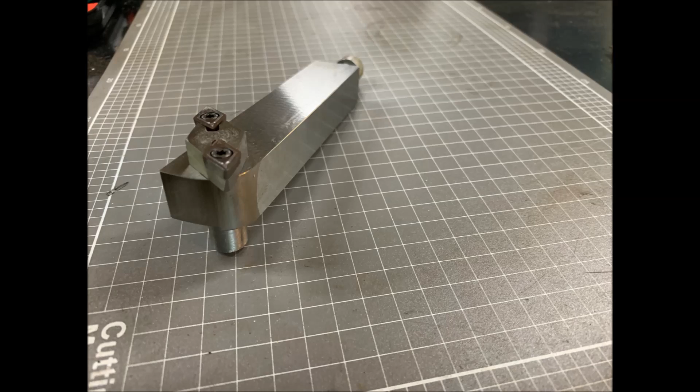Little diamond headed tool, and he sent me a couple of photographs of what he's done, and I must admit I'm absolutely chuffed to see somebody taking a description like this and making it their own, and he's done a fantastic job with it. So kudos to you, Warren. Great job. So there's the little locking pin.

Alright, that's the lathe slotter where we're at the moment. We've done all the slideways, milled in the dovetails, doweled it all in position, put the bridging plate across the top. So that's coming along very nicely at the moment. I'm really happy with the progress on that, but we're going to give this a rest for a week or two. I'm going to do a little series on something I used to do an awful lot of years ago, and that's pattern making and casting.

So I can't actually do the casting because I haven't got my little foundry set up at the moment, but I'm going to do a series on pattern making, and I was inspired to have a look at getting back into doing some pattern making by watching Emma at Emma's Spare Room. So any of you who watch her videos know that she's doing a little Henry Greenly designed Stuart Turner hit and miss engine, or a little gas engine, and she's doing the patterns and the core boxes for that little job at the moment.

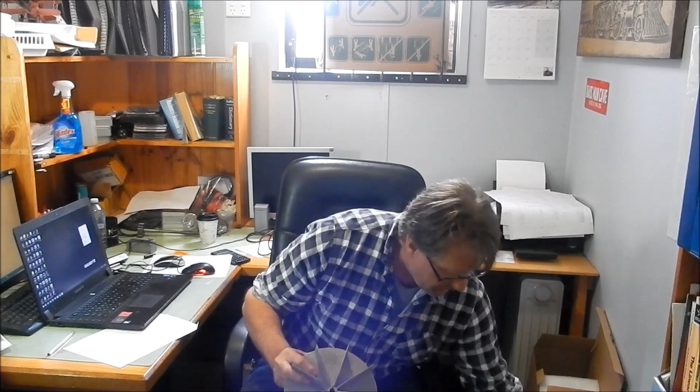And people ask me, how thin can you cast aluminium? Well, these ones here, we're down to 1 millimetre thick, and nearly 2 inches, 50 millimetres in depth. So we actually used to add a little bit more silicon into our aluminium, and I can tell you what, trying to put silicon into molten aluminium is like trying to dissolve sugar in cold water. Very, very hard. The patterns there for the casing, so yeah, we knocked out a lot of these over our time too.

We used to do loco plates, steam loco plates. I did a set of plates for the Puffing Billy Society years ago for G42, the Beyer-Peacock Garratt. So we used to do an awful lot of loco plates as well. So that was doing patterns by hand, and as I said, I take my hat off to Emma for what she can do there. It's absolutely brilliant. It does my head in if you can do those by hand.

I'll show you an example of some of the patterns that I've done by hand. I know for those little Zenith updraft carbies I did show the trial patterns or the trial castings that I did.

I actually saw a set of them on a Ronaldson Tippett tractor up at Lake Goldsmith, a big steam rally I went to last weekend. I was absolutely chuffed to see my castings that I'd done. I did a run of 25 of these sets for a bloke, and I was chuffed to see it on one of those old tractors. So I'll show you some photos of those handmade patterns for that casting set, and I'll show you the castings actually on the tractor. Have a look at these.

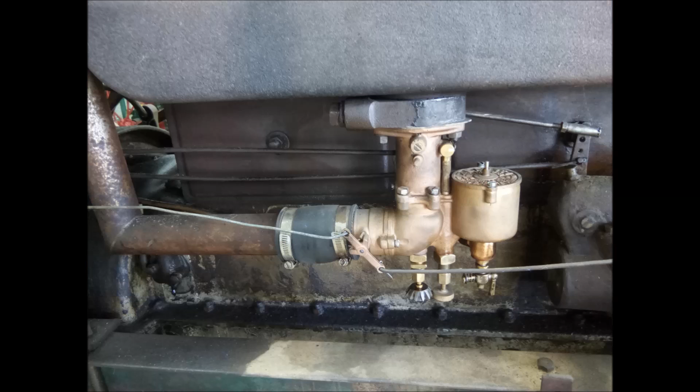So we're going to give the little slotting attachment a bit of a rest for a few weeks while I do this little series on pattern making, and we start off with the actual design.

As I said, I'm using Inventor. When you're doing pattern making using a program like Inventor, it becomes more like sculpting, more so than traditional design, which is what I use it for. There's a little bit of toing and froing on this, and sometimes you'll do things and the unexpected happens. It's a little bit fickle in that way. You have to set your ducks up while doing this particular job, because it can fall over and you've got to backtrack a fair bit and look at another way of doing drafting, filleting, and some of the functions that go into that.

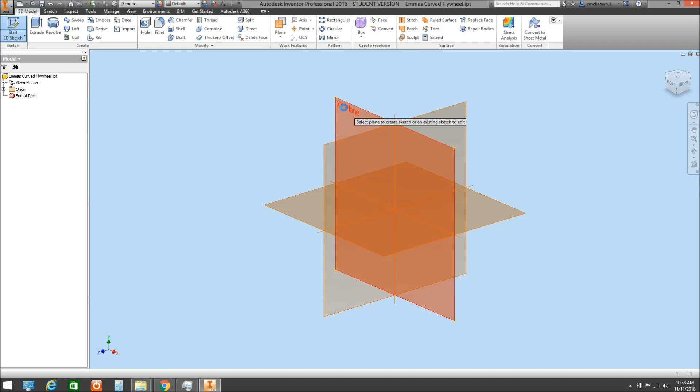Now, with any parametric solids program, whether it be Inventor, Pro E, or SolidWorks - there's a myriad of them out there at the moment - we always start off on a sketch plane. Well, 99% of the time we start off on a sketch plane. We can bring in solids, STL files, IGS files, and start creating sketch planes on the solid surfaces on those items, but 9 times out of 10 we're starting from scratch. We're going to start off with a sketch plane on a work plane. So we'll click on that, and it brings up 3 options for our work plane - front elevation, side elevation, or we can start off in the plan. I always default into the front elevation. It's just something I do, just the way I roll.

And the first thing I'm going to do is the outer rim diameter, and Emma's got, I think it's 148. Well, I'm going to make that a tad smaller. We'll make that 140.

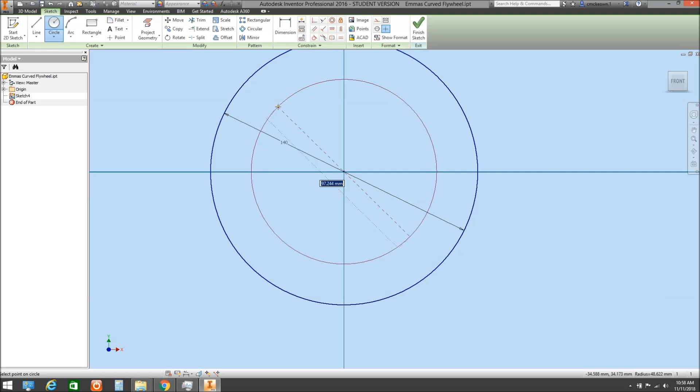And we'll do our inner rim. Let's make that about 110.

We can change these at any time throughout our modelling. We can go back into the features and we can change the thickness, the diameters. We can change everything as we please, and that's where we sort of start sculpting a little bit to get the shape the way that we want it to be.

We'll put an inner hub. We'll start off at 25mm and we'll see how that goes.

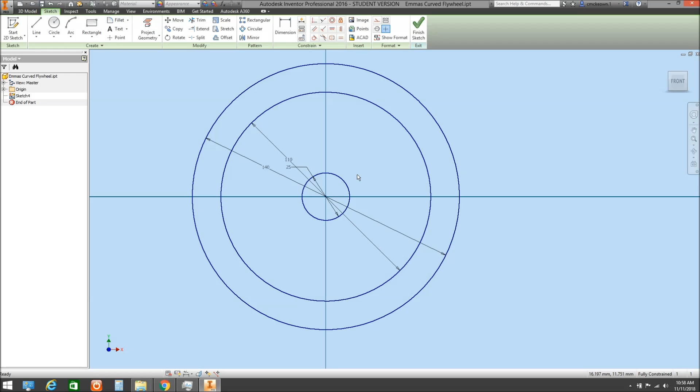So we've got our base components for our flywheel. So we've got our outer rim and we've got our inner hub, and we're going to create that as a solid. So we're going to put a bit of meat into that.

So we're going to extrude out those shapes, our inner hub and our rim, and we'll do that at 28mm, which is what Emma's got on her little description there. And we've created a solid to start with.

Now we've got some surfaces here. We can start putting features on surfaces if you're building up a machine component or whatever you might be doing. But in this particular case, I want to start sketching out the curved spokes.

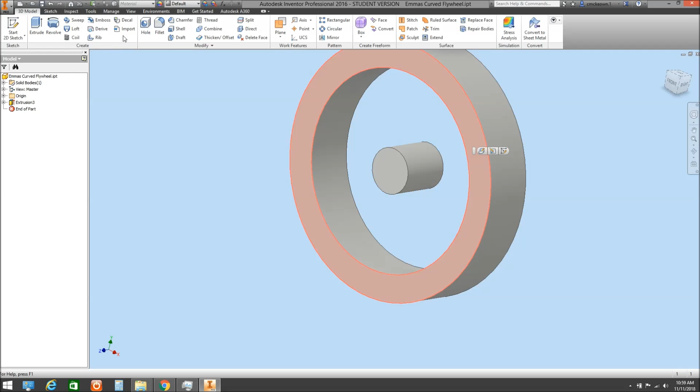So I need to create a new work plane that I can create a sketch on. We'll just create that new work plane right smack bang in the middle here at the moment. So I'll just quickly do that new work plane. And as you can see, that new work plane cuts it in half.

And that's what we're going to create a new sketch on, which is what we've done. Right, once we've got a sketch plane on, we can transfer shapes or outlines from our solid components or another sketch onto our new sketch surface.

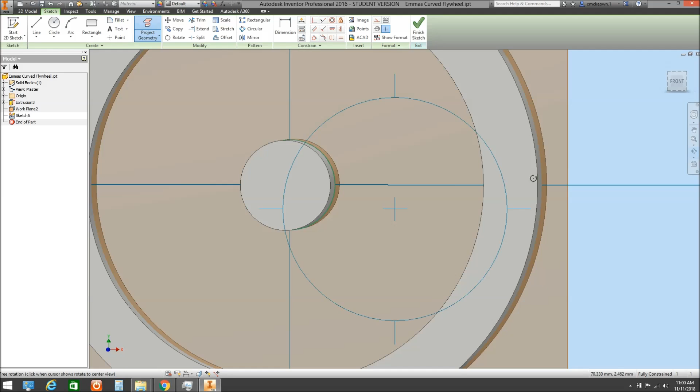So we can do that by doing it as a project geometry, and this will start giving me some structure to start working to. So we'll do that inner hub, and we'll do the inner rim as well. So you can see that's gone in green, those lines. So we now have some line work down on our new sketch plane.

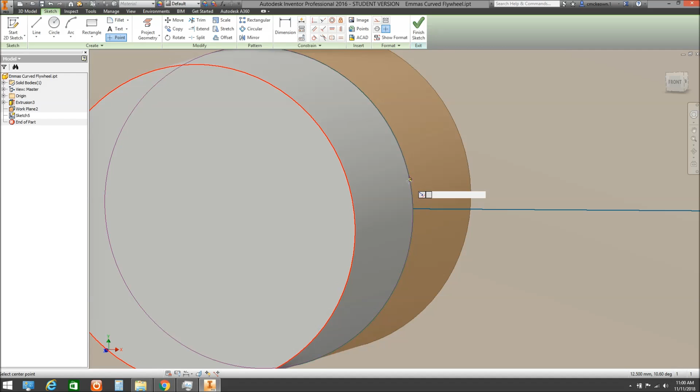Setting up little datum points to start working, and I like to use points. So I'll bang a point on that rim, doesn't matter where it is, it can be anywhere you like, and we'll pop another point on that inner rim there.

Now if we have a look at that, we can move those points around. As you can see, we can drag them and move them around that rim. We can put them wherever we like. They're not constrained, and in sketching we like to have things constrained, and I'll show you a little bit more about that as we go.

So at this stage I'm going to constrain those points horizontally to the center point of our hub.

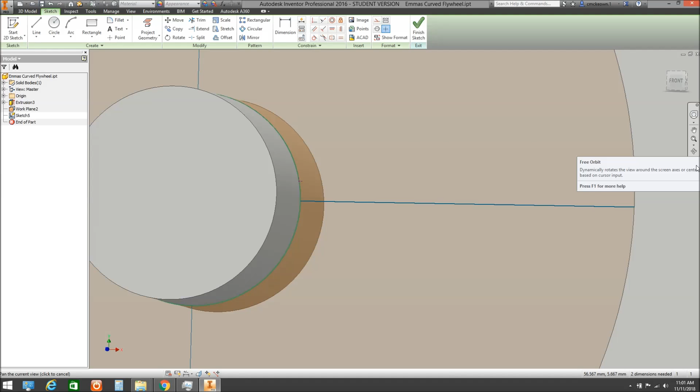I want to mention before, this isn't a tutorial on how to use Inventor, it's how I roll with it. You can put 5 or 6 people into a room that are experienced Inventor users, and they'll all go about modelling differently, but there are a couple of hard and fast rules that we like to stick to, and we'll go through those a little bit as we go as well.

So let's set up some horizontal constraints for those points. So if we grab that and pop that in there, you'll see that goes down into horizontally, and we can't grab that point, we can't move it, and we're going to do the same to the other one. So those points are now constrained, they're locked into our geometry, we can't move them.

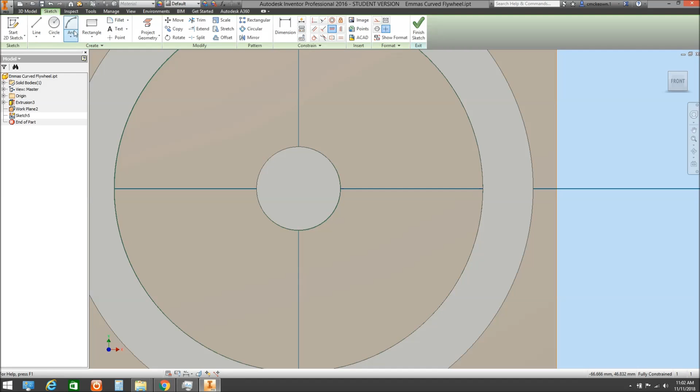Right, from those I'm going to use that to create our arc. So I'm going to grab our arc, and I'm going to go from start point at that point to an end point on that point, and then we're going to give it a radius. So I'll start off with a radius of 50.

Now if we have a look, that arc is now in blue, that line work is in blue, which means that it's fully constrained. We can't grab that and move that around. It's locked into our geometry and it's locked into a dimension.

Right, we'll give our curved spokes a little bit of width. So we're going to offset that arc, and we're going to move it up to wherever. Now if you have a look, this has gone in maroon. That means that we can grab that line and we can move that wherever we like.

It'll still remain as an arc, but the radius will change and the position changes. Now that is not constrained, and we need to put in some dimensional information to constrain that back.

So we're going to put a dimension in here, and we'll give this spoke a width. Let's start it off at 8. We'll see how that looks as we go.

Another thing I want to do is put in what I call a rail. With any of these parametric solid modelling programs, you want to think a couple of steps ahead and start setting geometry up for sketch planes or geometry you may want to create down the track. In this particular case, that's exactly what we're going to do, so I'm going to pop a line in.

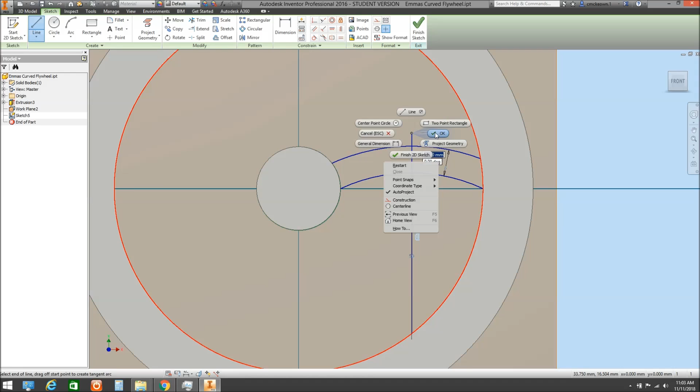It's going to be at right angles. It doesn't have to be, it can be anywhere along here, but just for convenience I'll stick it in as right angles. As you can see, we've got that line in there, and it's nice and blue because it's constrained at 90 degrees, and we've given that a length.

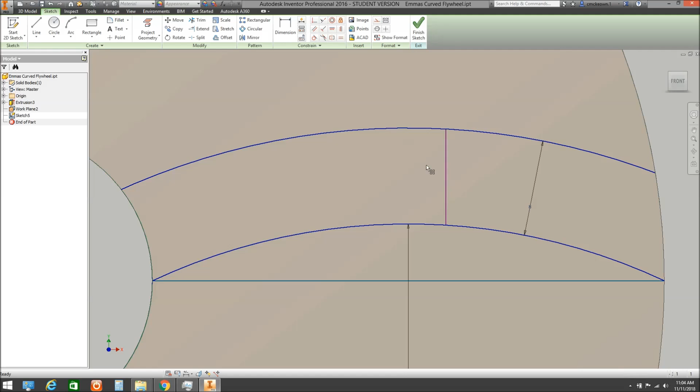What I want to do is trim that back to our spokes. If we have a look at that, it's now gone maroon, so we can grab that and move it around, and we don't want to do that.

We want to constrain that back in, so I'm going to constrain it with a dimension again. I'll give it from the center point out to there, and give that a dimension. You can see that's now gone blue - it's fully constrained, it can't move.

Now, if we don't constrain sketches, and you might have been working on a model for a few months, building up a machine with all the componentry, and somewhere down the track something has moved, it throws everything out. You'll get errors coming up all over the place, and it is an absolute pain to backtrack weeks of work to try and fix an issue, and sometimes it can be really laborious to fix that problem.

So I do myself a favour - I make sure my sketches are fully constrained before I move them into a solids base.

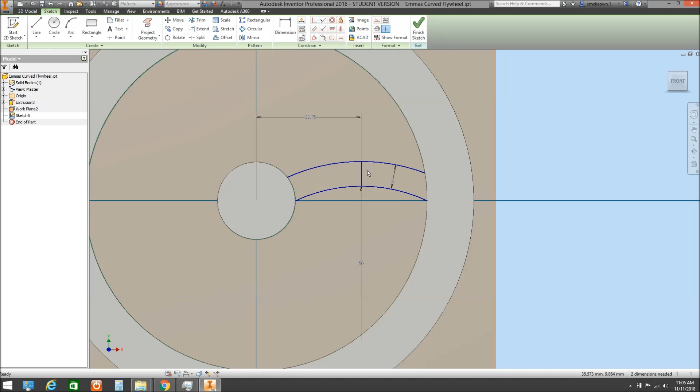Now as I said, we've now got some geometry, and I'm going to set up a new work plane that I'm going to create a sketch on to start doing the shape of our spokes.

Before I do that, there are a couple of simple ways we can do this. If I was to extrude, I can't extrude that shape just yet. I can extrude that out, lock it in on the ends, extrude that out, and create a rectangular type spoke, and then fillet it to smooth it out. That's one way we can do this.

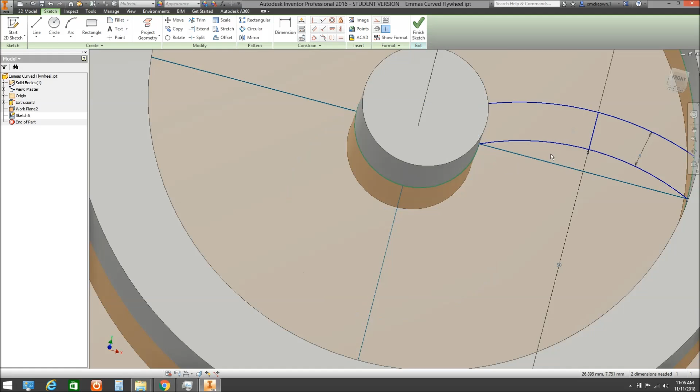But I'm actually going to do this with an elliptical type spoke. I was up at Lake Goldsmith, as I mentioned a little while ago, and I was having a look at a lot of the curvy spoked flywheels up there, and they are an elliptical type shape, so we're going to do the same with this one.

Because we're going to do an ellipse, I'm going to do what's called a sweep on this, which means I'm going to project that shape along a line to create that spoke. So I need to put in what I call a rail.

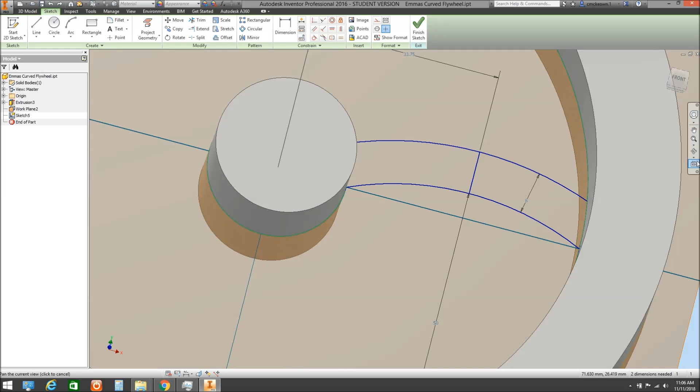So before we actually put that new sketch plane in, I'll just do an offset of this. I'll stick it up here. Then we'll put a dimension in, which is half, which is going to be 4mm.

So that's going to be smack bang in the middle. And if you have a look, you can see the rail actually runs into the solid. If I highlight it there, both into the hub and into the rim, and I want that to extend a lot more into that solid - you'll see why I want to do that a little bit later down the track.

So I'm just going to put a line in here - doesn't matter where it goes. And I'm going to extend that rail into those lines. So if we have a look now, if I highlight that rail, you can see it extending well into the solid. Right, let's finish that sketch out.

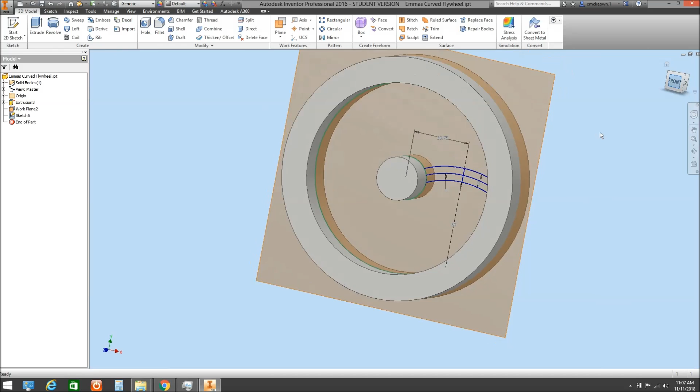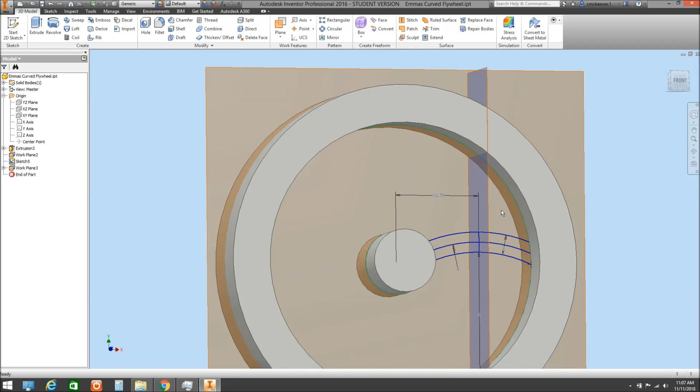Let's create a new work plane. So I'm going to do that now. I want that to be at 0 degrees. So if we have a look at that, you'll see that we've now created a new work plane to start our new sketch operation on. So we'll create a new sketch on that work plane, and that moves around.

And what I'm going to do is project that geometry that we created in the previous sketch onto our new sketch plane. So I'm just going to project that across. So we now have some geometry that we can work with. I'm going to create an ellipse just in here. So green means, in this particular case, it's snapped to the midpoint of the line that we just projected over, and we're going to go to that outer edge of that line.

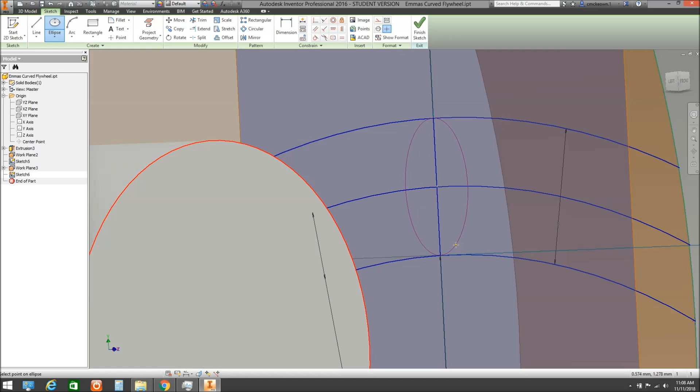I'll just stick it in there. Once again, you can see that's gone in the maroony colour, and we can change that around or whatever we like, which is not good. It's not constrained. We want to constrain that into place, so we're going to give that a dimension so we can actually lock it into place. Let's start off making that 3mm.

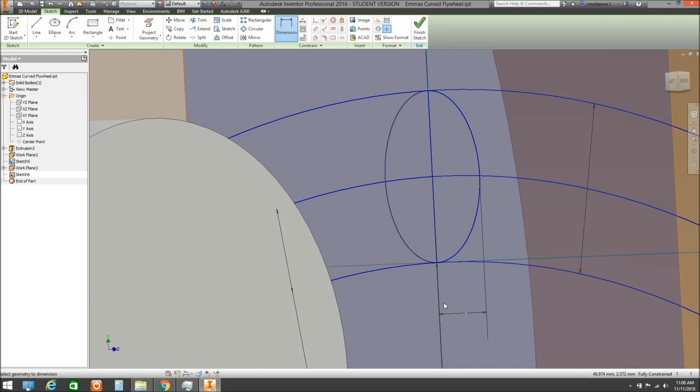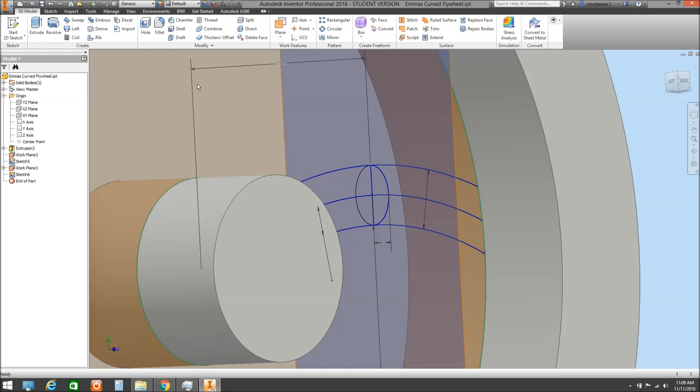So we've now created the shape of what our spoke is going to be, and now we want to sweep that around to follow that curve that we've created. So we'll finish that sketch out and we'll go up to our sweep command. I use sweep commands when I'm doing platforms or ladders or stairways. Create a shape and a sweep rail to create handrails. A very quick and easy way to do it.

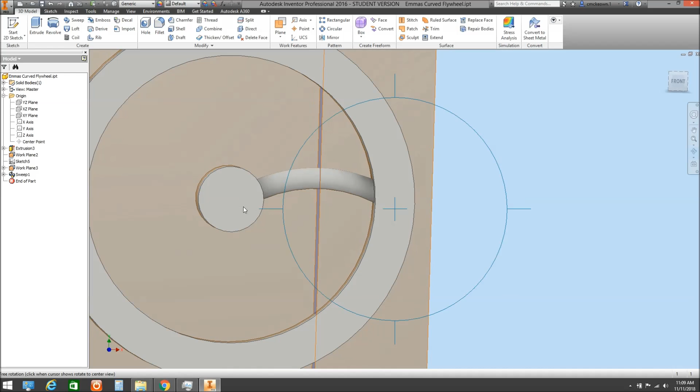So let's highlight the shape that we want to sweep, and then we have to give it the path or the rail that we want it to follow. So we'll just click on that. Okay. Now that's now created our first spoke. Right. Looks a little bit spindly, I think.

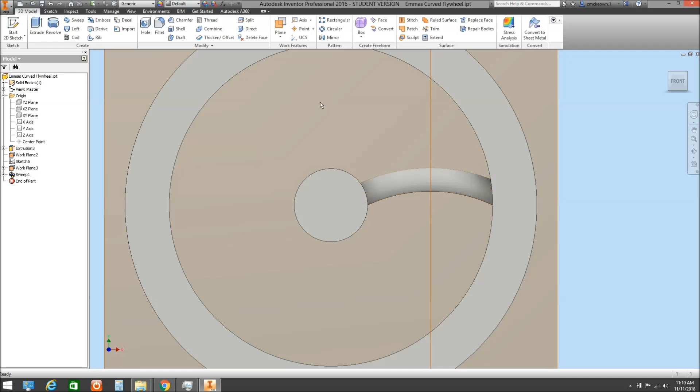We might be able to put a bit more curvature into that, but what I'll do, let's create the 5 spokes around here, and then we can modify and we can start caressing this a little bit to give it the shape and size that we want. So I'll do a circular pattern for that. So I'll just highlight the shape that we want to work with. We'll give it an axis that we want it to revolve around, and we want to do 5 spokes, 5 instances of this spoke. Okay, let's just have a look at that and see how that looks. Yeah, I think that looks a little bit too spindly.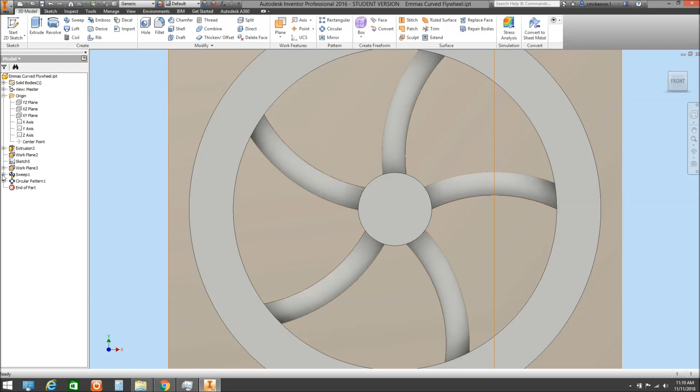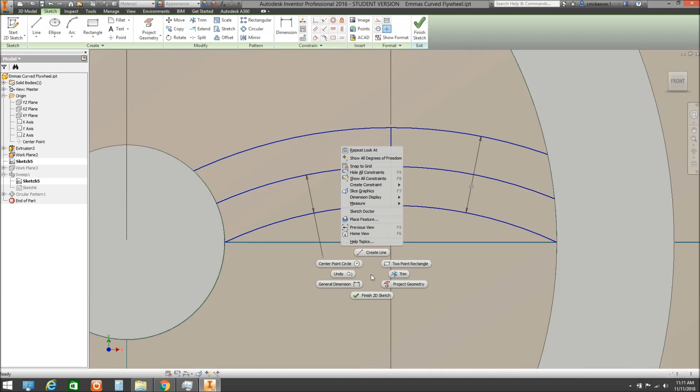So what we can do is we can go back into our sketch plane of our sweep. So I'll just grab that, and I'll leave it at 3. We won't do that just yet. I might go in and make this a little bit thicker. So going back to one of our previous sketches, and as I said, we can go back at any time and change any of the parameters that we put in. So let's try that at 10. Change that to 5 for our rail, and we'll finish that 2D sketch. And as you see, that now updates.

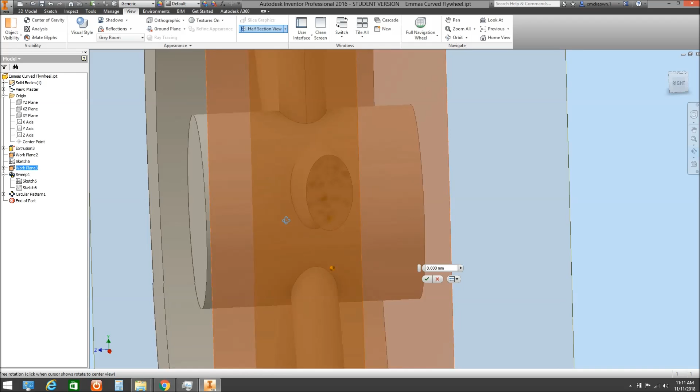I want to have a look at the shape of what that flywheel is looking at, what the ellipse looks like. So I'm just going to have a quick look at that. So I'm just going to do a cut section on that, so we can have a bit of a look at it. So we can see the shape in there, and I reckon it's looking a little bit too flattish. I think we might thicken that up a little bit.

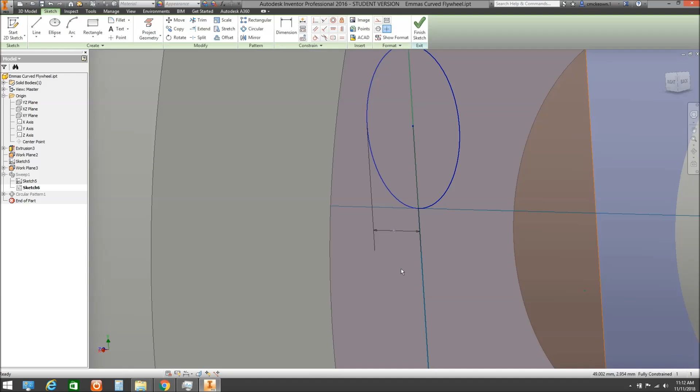So let's go back into our ellipse. At the moment I've got that 3mm thick on the half, so that's 6mm total. Let's bump that up to 4mm, which is 8mm total thickness when the spokes are together. Now let's have a look at that. Doesn't matter which way we look at it. That's looking better. It's a little bit beefier.

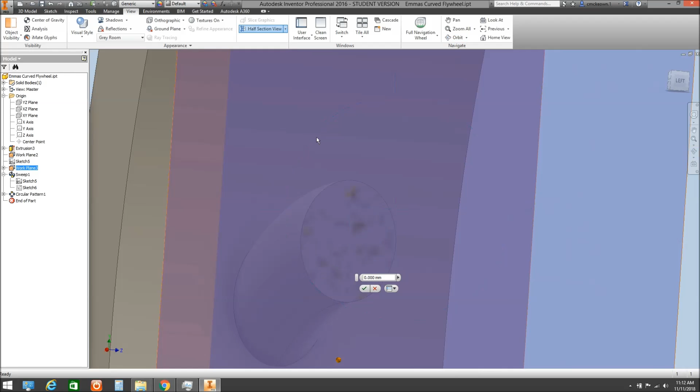Let's see how our spokes are looking. I reckon that's looking a little bit better. A little bit better shape, a little bit more meat on them, I think. We'll leave those spokes at that. As I said, we can change them. Now look, I might make them a bit curvier. So we'll go back to this initial sketch. I want to put a little bit more curve into those. Let's try it at 45.

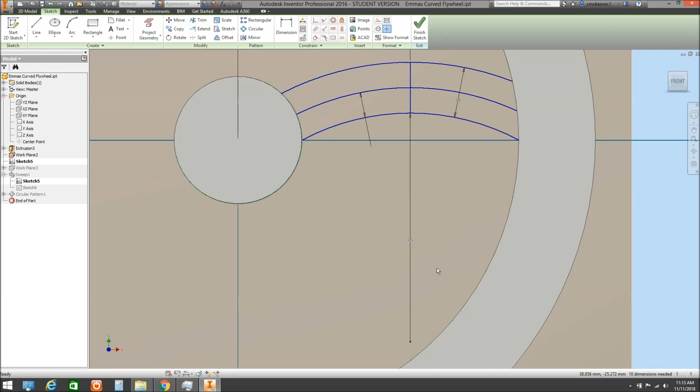I think we can go a little bit more. So this is where we're sort of using our eye a little bit to get a shape that we like. Looks a little bit better. Right.

Excuse me while I have my coffee. Can't start a day without coffee.

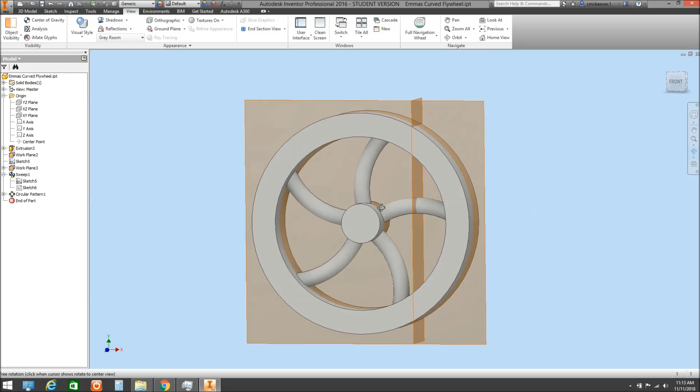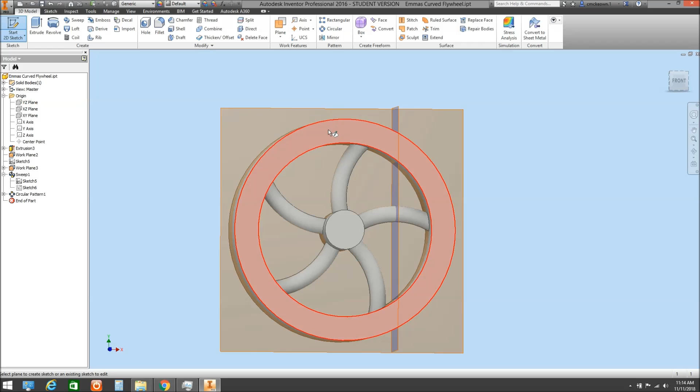Alright, let's start putting some features in on this rim now. So it does have a step down, and I do go back into Emma's photo. It's not a big step down, it's not a big shape in that, but what we'll do is go back to our 3D modelling. We'll now create a sketch on that solid's face. This is what we now have, and we can start sketching on that.

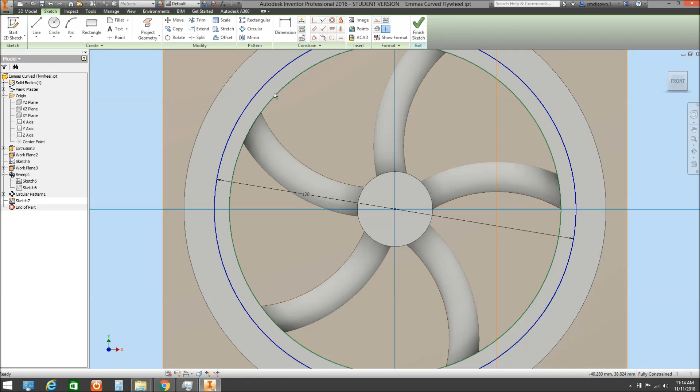So I'm going to put a circle in. Let's go back to our face. I'm going to put a circle in, and I'll put it in 120 just to start with, and we'll see how that starts looking anyway. Now I'm going to project that inner rim down to give us some more geometry onto that sketch plane, which allows us then to extrude that down.

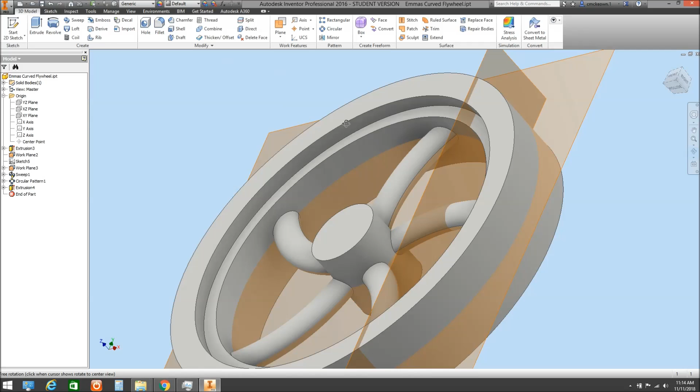So we're going to extrude it, but we're not going to extrude it out as it shows up there. We're actually going to cut it in, and we're going to give that a depth to cut in. So let's make that 5mm, and we'll see how that looks. I think that can go in a bit further. So let's take it in 7mm and we'll see how that looks.

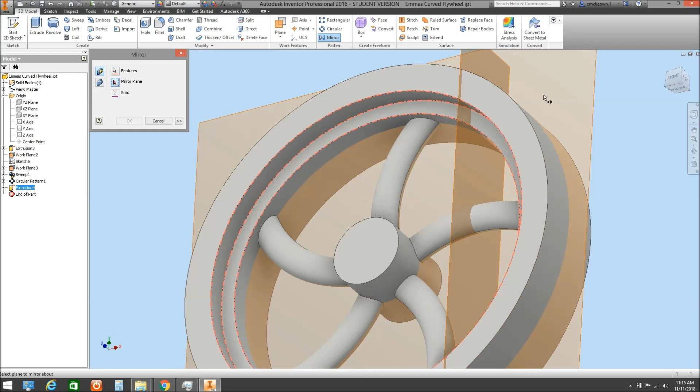That's better. Now what we can do is we can mirror features that we have here onto the other side. So we can go up and use the mirror function here. We can grab that feature, we can give it a mirror plane, which is that fella there, and we can go OK. So that extrude cut is now on the opposite side.

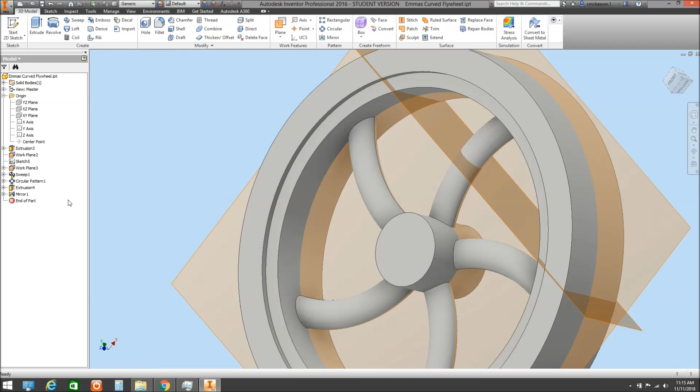And if I was to go back into the original and change that back to say 2mm, if we revolve that around, you'll see that that has also done the same thing. If we don't want that to happen, we can create a new sketch plane on the opposite side and do it in its own right. But, we'll go back to 7. Right.

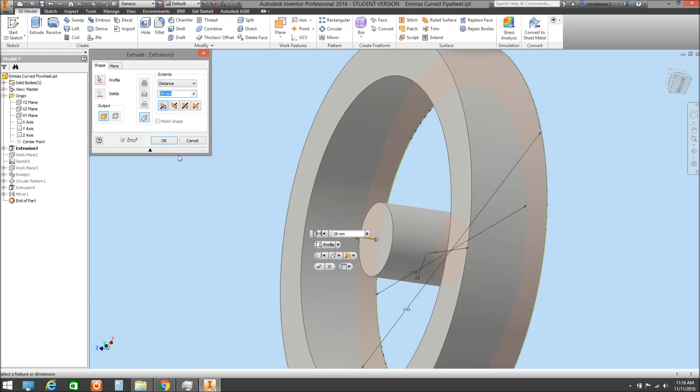To me, that flywheel just looks far too thick. So I think we might go back to our original extrusion, and let's cut that. Let's go back to 28 and we'll just see how that looks. Right, we just need to change our step downs on here. Let's take that back to 5 then. Right, let's just have a look at the shape and the thickness, and I reckon that is looking quite a bit better.

And as I said, we can go back to any of the sketches and we can change that geometry whenever we like. So for example, we say, look, let's put a little bit more meat on for machining. So let's allow a 5mm machining allowance. So let's increase that outer rim out another 5mm. Finish the sketch, and up. There she goes, she updates. So as I said, we can come in at any time, we can change that geometry.

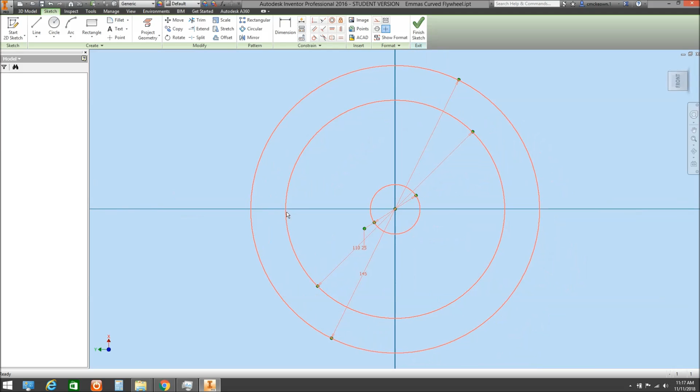We can sculpt it. And that hub, I reckon, looks a little bit too big too, so I think we might go back to that original sketch plane there, and we might knock that back to, let's go back to 22 and see how that looks. That looks quite good. Put a bit more curve into our spokes as well. Move that back and just swing that around. So I reckon that's starting to look pretty nice. It's got a pretty shape to it. It's got a nice curve. It's got nice lines on it.

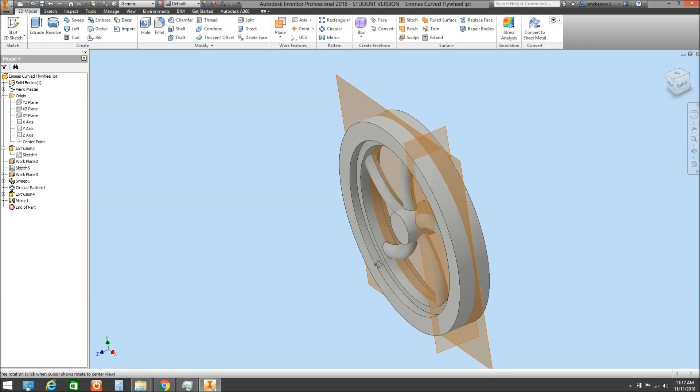Now what we need to do is start doing some filleting. No, we won't do the filleting just yet. What we will do, it's one of those things, you've got to look at what feature I'm going to put in before I do another feature. In this particular case, with any pattern, we want to have draft. And I want to create the draft on this so that we can draw it out of the sand.

Before I do that, I'm going to make a copy of this to become the backside half of the pattern. I'm going to use this for the front side, so I'm just going to go in here and just do a save a copy as. Okay, so we're going to call this flywheel. I'll call this part 2. And we'll save that.

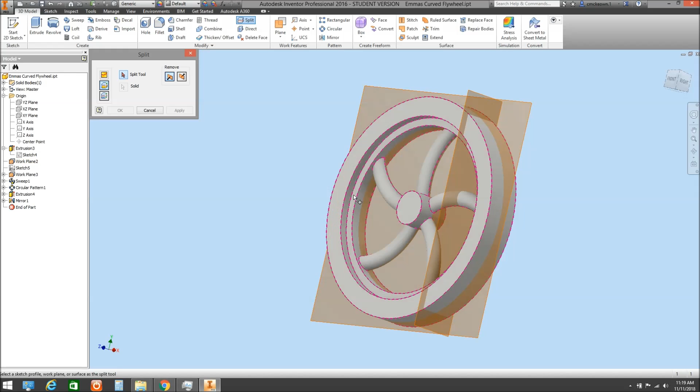Right, what I'm going to do now is I'm going to split this in half because this is going to be a split pattern. So let's do a split. So we can come up here, create a split on that. That's the entity that we want. You can see it all highlighted in the pink there. And we need to give it a plane that we want it to split through. And it's saying it's going to split it from the plane back, which is what we want. We'll OK that. So we now have our split pattern.

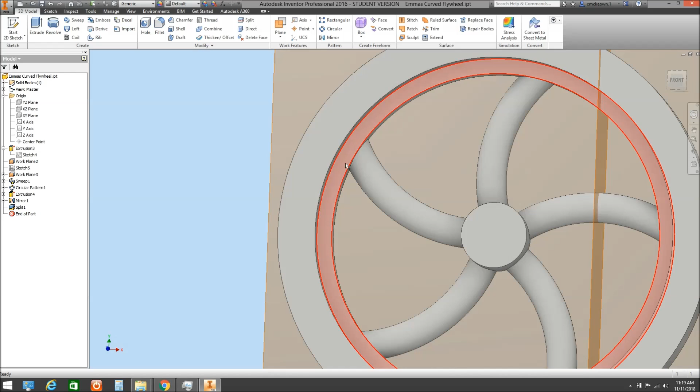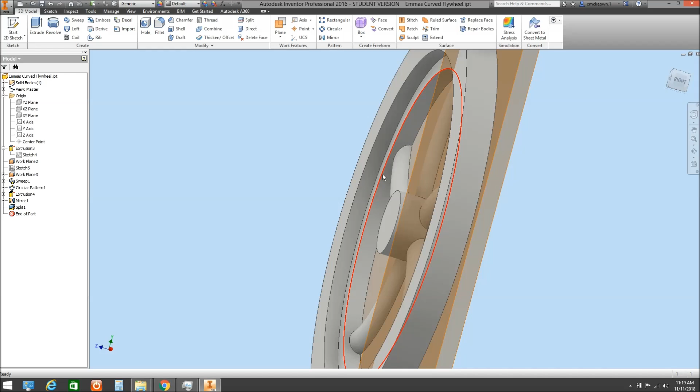Alright, let's start putting some fillets onto this. Now obviously when we've copied this, we've lost the connection between the two, so they're now two totally separate halves. We can do that differently, but I want to do a couple of different things on this. One thing I might do before we start is, this is the one that's going to be up close to the engine, that's going to be rubbing up against the spigot. Probably want that sitting out a little bit further, that hub. So there's a couple of ways we can do that.

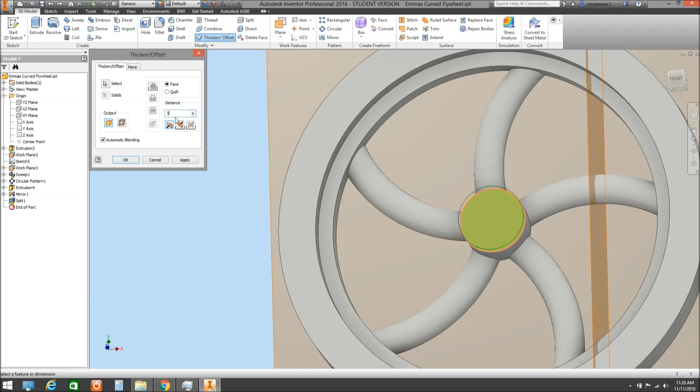We can create a new sketch plane, project the entity and extrude it, or we can just go and do what we call thicken onto that face, and I'm going to give that another 3mm. Okay. Once again with that I'll just show you, on thicken we can actually do that as a, why don't we do it as a negative? So it's been a while since I've used this here, so we have to come back in here. We'll give that 3mm, but we'll give it a negative cut in, so we can actually remove material like that. But we want to add some material on, so we'll thicken it in the positive direction of 3. So we can see that that's now sitting proud of our rim.

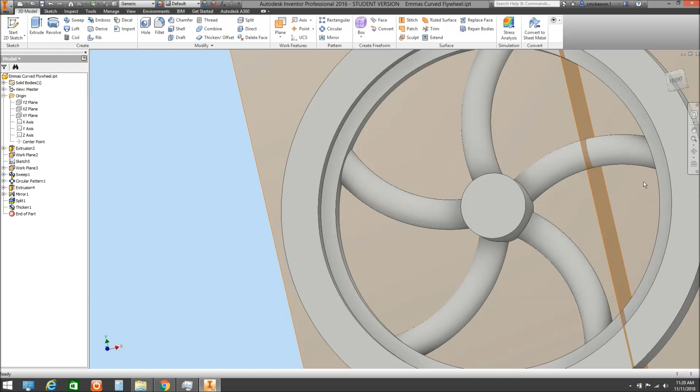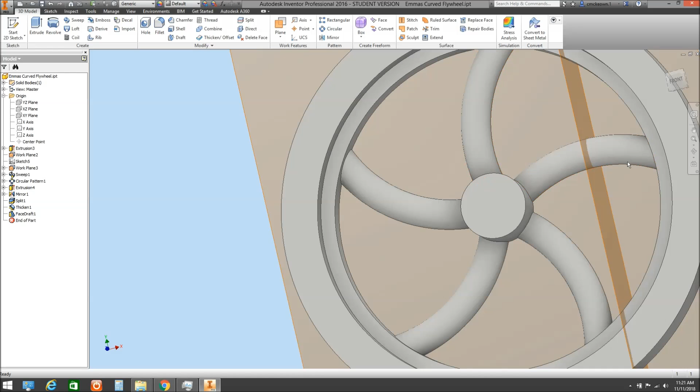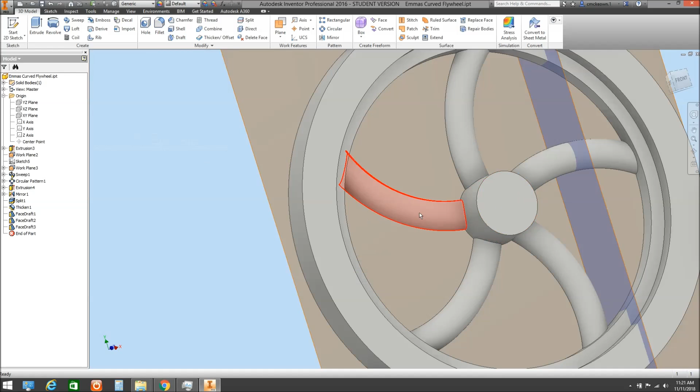Right, let's get some draft put into this, so that we can remove it out of the sand. So we have a draft command up here, and we need to give it a pull direction, and I always give it the pull direction of the actual plane. And we can select the faces that we want to draft, and they have to be in the same plane to start with for these ones. And the pull direction looks okay. We'll okay that. We've got to put some draft on the outer rim of this, so we'll draft that again. Select the rim. That has done it in the right direction, and the inner hub we want to put some draft on that as well. So once again we'll select the pull direction, select the face, and that's going to draft out for us quite nicely. So we've now got draft put on all the faces that we need to have put on this.

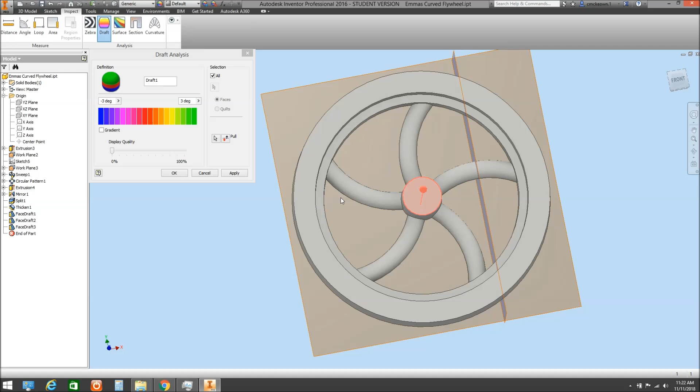And when you're doing cores and you need to put draft on cores, and some of the cores that I've done in the past are very intricate, it's very easy to forget a face. So we can come in and do an analysis of this and actually check the draft before we move on. So we can come into inspect, and we can select draft, and it brings up a color palette. So 0 draft is in red, going out to green, which is a positive draft, which means that we can draw it out of the sand easier, or down to blue, which is a negative draft or an undercut. So we give it a pull direction that we're going to withdraw it out, and we'll go OK on that. If you have a look, that's all in green, which means that that will be able to be removed from the sand very easily.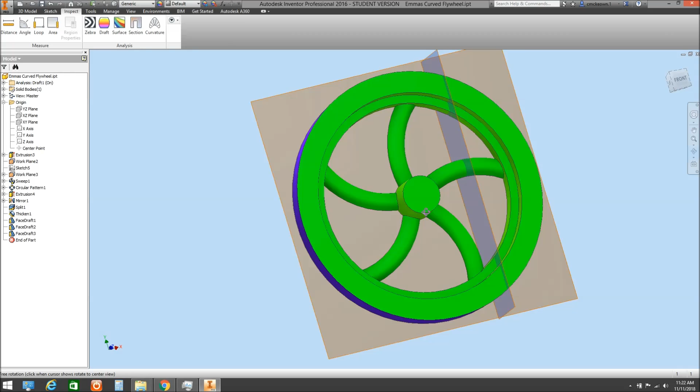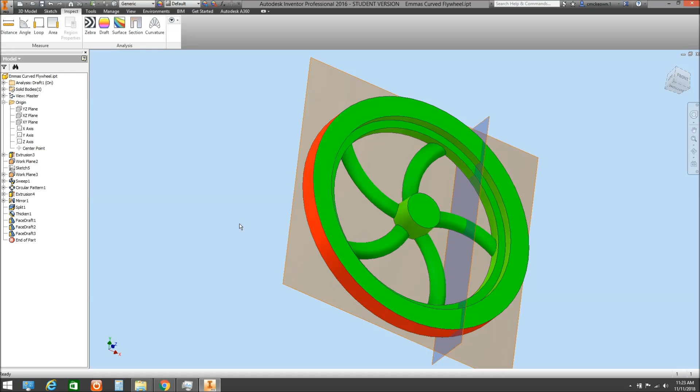If we were to change, let's just select one we can see easily. If we were to change that, and I was to change the pull direction, I'll go OK. You can see that's in blue. So what that means is that that is an undercut, and that is going to drag our sand out, which is what we don't want. So we want to go back vice versa. If we just made that draft angle 0.01, because we can't have a negative draft, you'll see it goes red, which is basically 0 draft. So we'll go back to where we were.

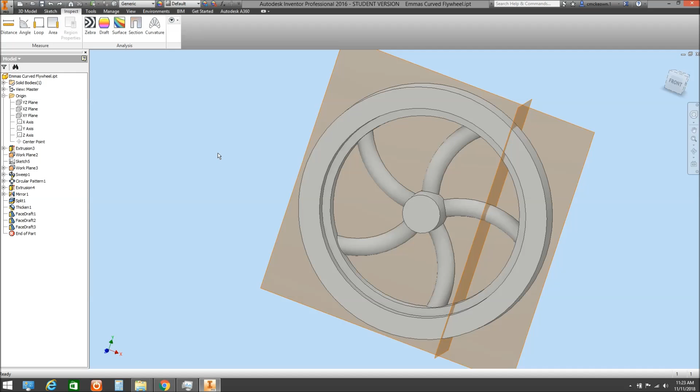Right, so we know that we've got the draft right on this, and now we can start putting in some fillet features. If I put the fillet features in before I draft, sometimes it doesn't work because the face does change where the fillet has been put in, and it goes a bit astray on us. So we'll go back to our 3D modelling. We'll select our fillet command, and these ones that connect up to our rim, we'll make them 3mm, and we'll just see how that looks. Okay that, and we'll do the one up to the hub. So we'll select our fillet, 2, and we'll select that.

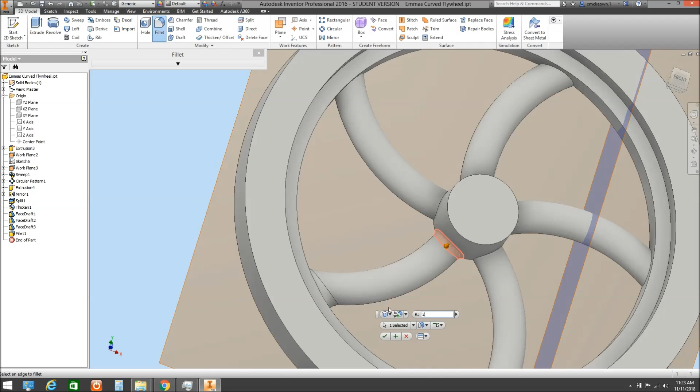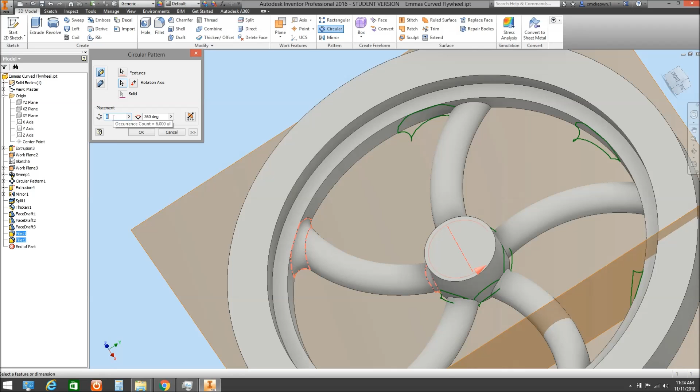So it doesn't look too bad, I don't think. That looks quite good. So what we'll do is we'll circular array those features. So we'll select the 2 fillets that we've just done. We'll give it the rotational axis that we want it to roll around. Once again, we're going to do 5 instances of these fillets, and away they go.

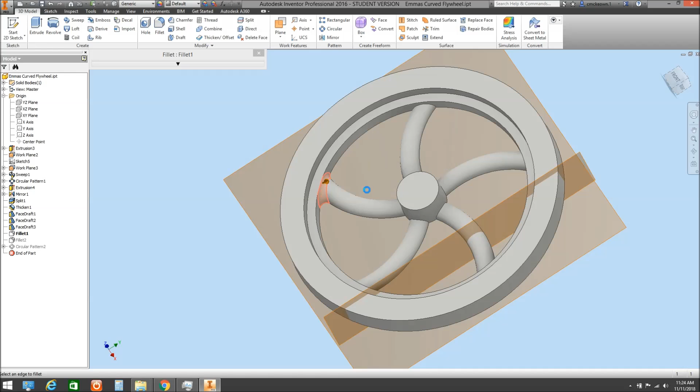Now, as like before, if we go into any of those fillets and we change it, let's change it back to 2, it updates all the other fillets that we've just put in. So I'll put it back to 3. Okay. Right, well that's basically our pattern, or this half of the pattern completed.

There's another function that we can do, and I'll show you next time we come on here, and that's called deriving. We can do a derived component, and that's where we can do subtraction. So if we're doing core boxes, we can create this as a positive. We can put it into a box and subtract it, and instantaneously create our cores to machine.

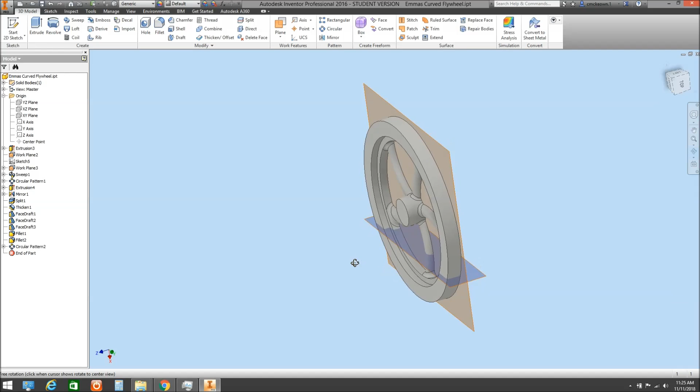Great thing with this is too that I can go and derive component, and I can scale it. So I can scale that up. For example, let's just say we're doing these in aluminium. I can scale it up 1.8% to allow for the shrinkage factor of that aluminium. So very, very versatile for doing dies and patterns. And it's got some fantastic features on it.

And I've had a look at the Fusion 360. Very, very similar features. So I've had a good play around with that. For me, that's cloud-based, and if I take this to work where I work, which is a bit remote at times, I don't have an internet connection. So because it's cloud-based, Fusion 360, just to sit down and have a fiddle during smoke hours or lunch, I can't do that. Whereas my son's version here that I'm using at the moment, the student version, if he lets me keep his laptop for a few more days, I can finish these off.

So what I'm going to do is that other half that we created, we're going to go through the exact same structure to create the second half. So I'll do that off screen, so to speak, to create that. So that'll create our 2 halves. Then we'll put it into our CAM program, and I'll go through setting up the machining operations for that, and then coding to get that to be read by our CNC machine.

There's something I might do now. I did have customers in the past with our foundry ask, can we put in logos or pattern numbers or drawing numbers onto the faces, so that if it has to be replaced, it's very easy to go back and get a pattern, or go back to a drawing that was created from, and we can do that fairly simply.

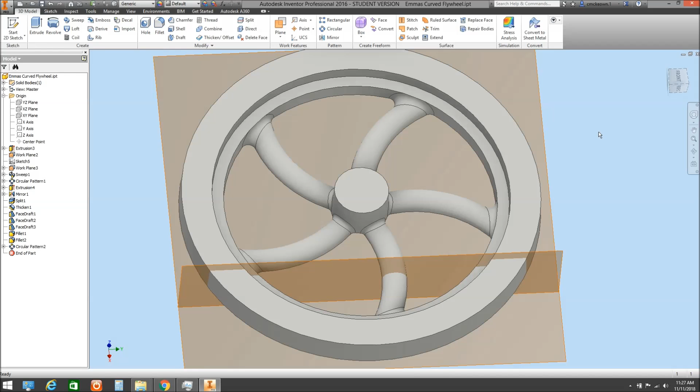So we might do that next, but yeah, just for now I think we'll leave it at that. We've got a nice shaped little curved spoked flywheel that would go on that beautiful little Stuart Turner engine that Emma is doing. I think it was designed by Henry Greenlee actually.

So we might leave it at that for now. As I said, I'll do the second half. I'll just quickly put that together. When we do come back, I'll show you this as an assembly as the 2 halves together, and then we might have a look at those, doing little core prints on here to put some emblems in, or some writing into that rim.